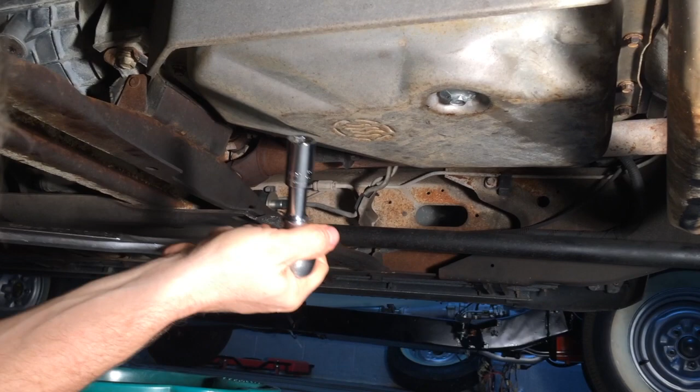Alright guys, like the title of this video indicated, we're going to be doing a partial rebuild on this 4L80E transmission attached to this diesel Suburban. Just going to start with draining the fluid out. Got a replacement pan bolt here. So let me get that going first and I'll explain a little bit more about what's going on.

Alright, so basically with those codes that this truck is getting, we're going to have to replace the valve body. And I normally would do this if I was going to rebuild the whole transmission. I did that several years ago on one of my other trucks, and I don't really want to get involved with that on this one. So I need just to get it back where I can get it running. And right now I can't get it running. It won't shift, going more than 35, 40 miles an hour because of this problem.

So what I'm going to do instead is I'm going to rebuild everything that I can get at from the bottom of the truck. Primarily to replace the valve body, but we'll also replace some of the springs and some of the other parts here. I'll take you through them one at a time as we go in here. So anyway, we're going to start with draining the pan contents, and then we're going to remove the pan. So I'm going to let this go for a while. We'll pause, we'll come back, we'll drop the pan, and then we'll keep going on from there.

All right, guys, have this finishing up draining. I'm going to go ahead and put the drain plug back in so that I can pull the pan. By the way, this was a 15 millimeter ACDelco replacement plug I had put on here a while back. You know, that original one from the factory with kind of like a Torx head never does last very long.

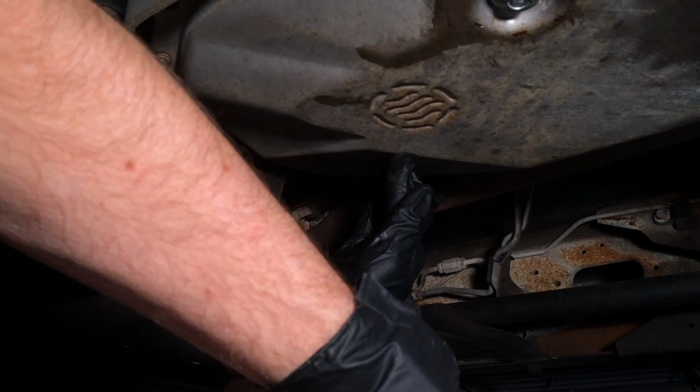So what I usually do is I get it out as far as I can to loosen it, and then I'll get under here and push this up, and then I'll just get in here with 2 fingers and unscrew it by hand. It's really the only way to get these ones in the back out. There's 17 of these bolts that you should have. And what I'm going to do now is finish this off. So I'm going to take these guys on the front out. I'm going to take this corner here off. And then I'm going to take the opposing corner over here off.

Okay, at this point we've got only 2 bolts holding it. I'm going to get all these bolts out of my way here. Set them aside.

And I've got this kind of leftover Thanksgiving pan from the wife here. I've kind of cannibalized. I've done this before in some other kinds of scenarios where I'm using transmission fluid drains. So I like to take something like that, sit it over the top here. You don't have a lot of room under here, but it's at least a little bit better on making the mess. Because what I'm going to do is I'm going to take the pan out of the way, and I'm going to use this to try and catch most of what's going to start dripping off here. Won't be able to get it all, but it'll make it a little bit easier.

All right, so now I'm going to push up again. I'm going to take the bolt I've got here in the lower left corner, left facing towards me, not from the perspective of the driver. And then I'm going to take the very last bolt up here off. All right, at this point, you've got no bolts holding it.

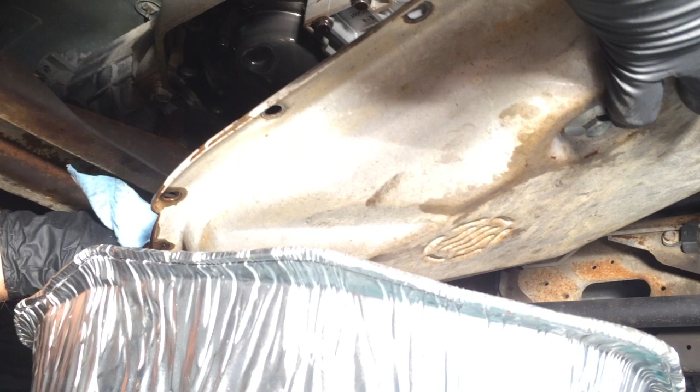Kind of lift it up now at this point. I'm going to try to get the pan to clear this rear cross member. And I don't know if you guys can see, but I'm just continuing to dump it in. Just a little bit more. And I'm going to lift it back up, and I'm going to take the pan and just kind of sit it over here to the side.

Because what I really want to do is I want to get this guy in position to catch the drips coming off the transmission itself. A few little drips down here.

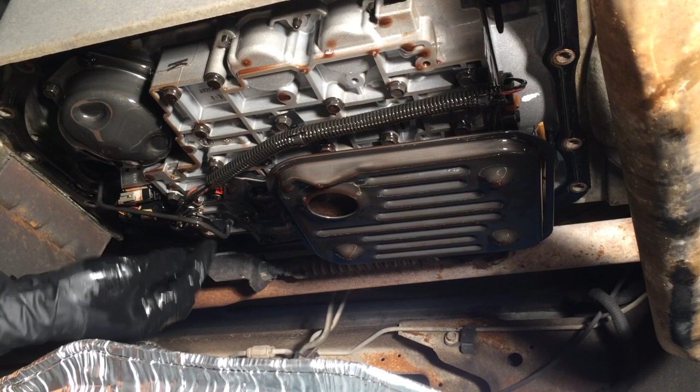All right, so basically we're at the disassembly phase now. What I'm going to do here is I'm going to let this guy drip for a while, and then we're going to come back in here and we're going to remove the filter, and we're going to remove the bolts that are holding these clips that are securing our wiring harness out of the way so that we can disconnect the wiring harness and set it aside. We're going to remove the clip that retains this oil feed pipe, and we're going to pull it out. And then we're going to start removing the bolts that hold the valve body into position, as well as the ones that hold the pressure switch over here.

First thing we're going to pull off is the pressure switch. So I'm going to pause the video here, let this drip for maybe, I don't know, maybe 10 or 15 minutes. We'll come back and we'll continue picking it up.

All right, we've let this guy drain, so let's go ahead and proceed with the disassembly. I'm going to take the filter off. Just going to wiggle it loose here from the bushing. And it's going to probably have some fluid in it that didn't drip out, so we're going to empty that out first.

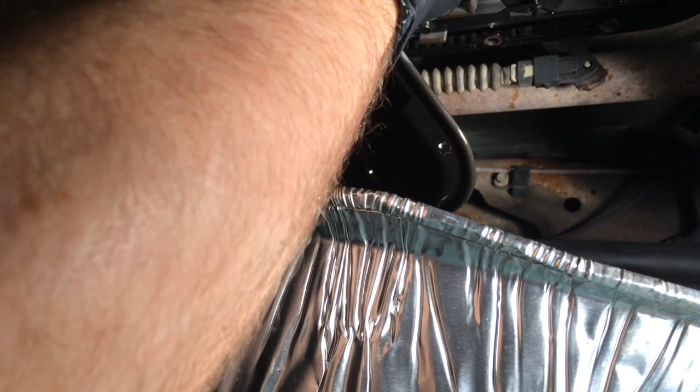And I don't know if you can see under here, I've got the drain pan I'm using to catch all this fluid sitting right in front of the oil pan itself from the transmission. What I'm going to do is I'm going to take parts like this after I shake a lot of this out, and I'm just going to set them over in the original transmission pan right over here, for example. Okay. And as I go, if I get little drips and stuff, I'm going to clean it up.

All right, so now we're going to start disassembling. So first, two bolts I'm going to take off in here. Clips that hold this harness on first.

Take these off, there's probably going to be some loss of fluid. I'm going to go ahead and put these in the pan as well. Over here. The clips themselves will stay on the harness, at least on the wire loom of the harness. Won't be able to catch it all. We'll catch enough of it. Okay, another one for the pan.

Okay, so the trick to getting this guy out back here, so you can see the first solenoid here, the A, is just one of these little ski clips. But this guy here, I couldn't see it until I got underneath, has 2. So you're going to undo both sides with the screwdriver. It's very similar to the guy up here.

Now this particular sensor here is just a single clip in the back, so we're just going to raise it up with the screwdriver. And then this guy's just going to pop right off, so it's just this little clip right here. And this guy is like the one on the front. It's both sides, and then it'll come off. All right, so we're going to sit this guy here. Now I don't want to get any dirt on this guy, so I got a little plastic bag, Ziploc bag, whatever. We're going to try to keep him in so that he does not hit the ground.

And then I want to get this pressure sensor plug off. In this case, it's got a couple of clips on either side that you squeeze. It comes off. Okay, so cannot get it off any further until I can get this crossover pipe off.

So what I'm going to do now is, so I've got my corner here, here, here, and here. I'm going to take these 2 out that are holding this shift gear position detent piece of metal lever. Loosened them already. This guy's under some tension, that's why you see him kind of flexing. And then we got the last one here. Again, I'm going to drop both of these into the pan. We'll clean all this stuff up later. Okay.

Now I loosened it. There's a bolt here holding a clip that retains this crossover pipe. So, and the pipe itself should just wiggle free like that. Put that in the pan. Okay, and then we're going to have to switch to an 8mm, I think. Let me see. Yeah, an 8mm, get this pressure switch off. Just going to loosen them for a second first.

A little bit of fluid's going to come out of here, no doubt. And some of these other ones that I was taking out off video, particularly these ones in the middle, when you take them off, there's going to be a lot of fluid that comes out. So just have whatever you're doing to catch all that in position. Since these are a different size bolt, I'm just going to put them in a little separate Ziploc bag I brought for myself.

I'm just going to take these guys off by hand as I go because I've already loosened them up with the electric ratchet. And hopefully that will give it time to drip out along the way. But we are nearly ready to drop the valve body. One other bolt here in the front that was obscured by that coil crossover pipe, this guy here, and then this guy here that we'll take out right after we finish this switch.

Go ahead and remove this last bolt holding on our pressure switch, and I'm going to remove our pressure switch while all this is dripping out here. Little bag here. All right, to get the pressure switch off, you just kind of give it a twist, and it'll let itself go. Okay, some of this runoff. Take this bag and put it in the drain pan as well.

And then we've got this bolt here. We will remove by hand. And this guy in the front. At this point, our valve body is only being held on by those 4 that we didn't fully remove. Okay, so again, I'm going to let it drip for a little bit just to reduce some of the mess, and as soon as it quits dripping, we will go ahead and pull the valve body. Let's come back in a minute.

So let's get this going here. So I'm going to push this catch pan and the little kind of oven pan I was using to catch things. I'm going to slide a new one into position, mostly because I just want to get more room to work here so I can drop the valve body. I've taken the cables, as you can see, and I've taken that bag and I've just rubber banded it aside so that I can make sure that none of this gets into the dirt or anything.

I'm just going to kind of pull it out of the way for a minute, because one of the things I did notice that we left up here was the actual pan gasket. It's kind of stuck up here. Yours might not have done this. They usually stick to the pan. I didn't even notice this until the last break there. So these gaskets are reusable, so as long as we don't damage it, we can keep it. Okay, get this guy out of here. Set him over on the pan where he should have been all along.

I'm going to take our wiring harness, kind of tuck it up under here, stick it up out of the way, keep it in the bag so it doesn't touch anything, get any dirt on it. Don't want to get any dirt at all on this. Okay, so very similar to the pan now. This guy's just held in by the screws that are here. I'm going to go ahead and take this guy out, so that'll leave just one in the back. And I'm going to go ahead and take the opposing corner off over here.

Now, the one difficult part of this whole thing, doing it upside down like this, because normally you'd have this transmission out and on a stand flipped over, is there are some little check balls that are going to be on this valve body on the other side. And probably when we drop it down, they're going to go everywhere. There should be 8 of them, although there's a couple of variants of this that might have 9. But just telling you right now, when you drop this, be watchful for that.

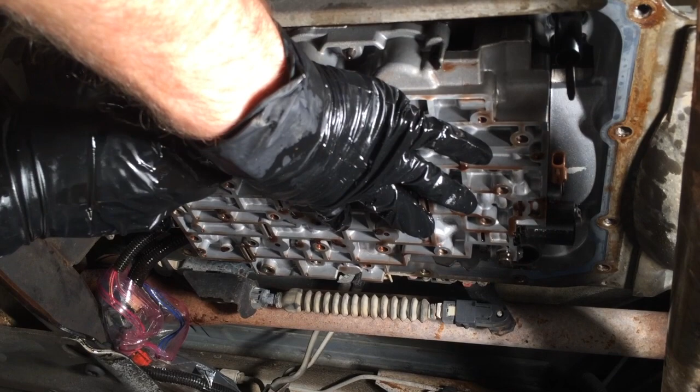So I'm going to do some last bit of positioning here. The plan is just to kind of drop this thing right into this pan I got below me. I got everything disconnected now. All right. I'm going to take this screw off. And then it's only held by this guy up here now. And I'm just going to let this guy fall down. Now there's also a spring-loaded guy that's going to come out with it. Let's get it into position here and I'll show you.

This guy here. So be watchful for him falling off as well, being upside down. We're going to replace all this anyway. Okay, so looks like I'll pull this out where you can see it. You can see those little balls I was talking about. Looks like they all kind of stayed on the gasket, which is a good thing. I'm just going to clean up some of this spillover.

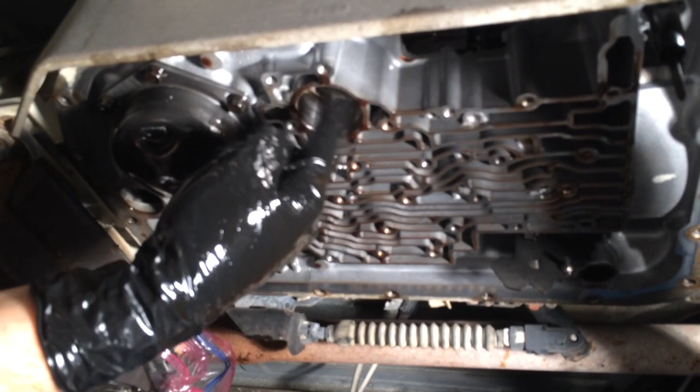At this point, we're almost done with what I had planned to do here. The only other thing I'm going to do is I'm going to remove this reverse servo cover here. I'm going to change out the spring while I'm in here. I'll replace this guy, and I think that's about it. I'm going to put some new check balls on it. I have an ACDelco rebuilt valve body. I'll show you all these part numbers in a minute.

I'm just taking a look here. You know, things don't look too bad. I think probably that valve body and some sticking solenoids were causing those codes, like that P1870, for example. All right, so let me pause the video so I can pull this stuff out from underneath the truck, show you what it looks like, and also show you some of the new parts.

So I've just gotten out from under the truck. I've pulled this pan out. This is exactly what you saw me drop down. And so here we have our complete valve body assembly and throttle valve assembly, and then we have the gasket sitting on top of it here, and then these are those check balls I was talking about. So there are 8 of them, and we got lucky. They're all exactly where they should be. 1, 2, 3, 4, 5, 6, 7, 8.

And then here's the first to second servo piston that normally sits right here, and that guy came out of his passage as well. So let me show you some of what we're going to be doing to rebuild this. So I've got a new pressure switch here, GM part number 242-22077. So since we got all this taken apart, we're going to go ahead and put a new pressure switch on.

I've got a part 242-23081, and this is a rebuild kit. This is basically going to replace our first to second servo here. So we're going to have to assemble this. There's a clip in here, the piston and the shaft, and this clip holds it down, and there's a seal that goes around the outer edge. Kind of see the old seal here. So I'm going to toss this and completely rebuild this. This is a revised design, so we're picking up the latest design here for the 4L80E.

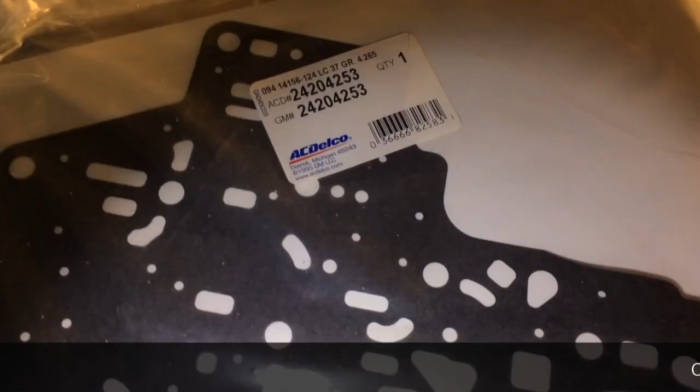I've got a new gasket. So this is this black gasket you see on top of the valve body, and this is a 242-04253. Right, so this is a whole new gasket that sits on top here. Now, I was going to try and reuse it, but I noticed that it had a chip out of it, so I'm going to go ahead and replace the pan gasket. So this is an 867-7743. It's a new pan gasket.

Here's our filter. We're going to replace the filter. It's a 242-10956 GM. And this guy's out of the way here. Also got a new gasket for the reverse band servo that I haven't removed yet, but I'll show you. I'll take that off before we stop filming. 867-5728, just a new gasket for that guy because we're going to change out the spring that's in there.

And here's a part number for that spring. 865-5843. We're going to change that out too. I haven't shown that yet. We'll do that in just a minute. And then I've got this big box, part number 192-07801, and what this is is a rebuilt valve body. Let's get this guy out of here.

So what you end up with here is, basically set these guys side by side for a minute. This is this entire assembly here, plus that gasket I showed you, and plus those check balls. Let me show you those guys. So those check balls are part number 104918. This particular package has 5. I've got 2 packages, so that I'll have enough to replace all 8.

And yes, you should replace these balls. They wear over time, and the orifice in the steel plate, I don't know if you guys can see because the truck's pretty big, blocking things, but the plate can get worn as well. I'll take all this out of the plastic and we'll look at it again as well.

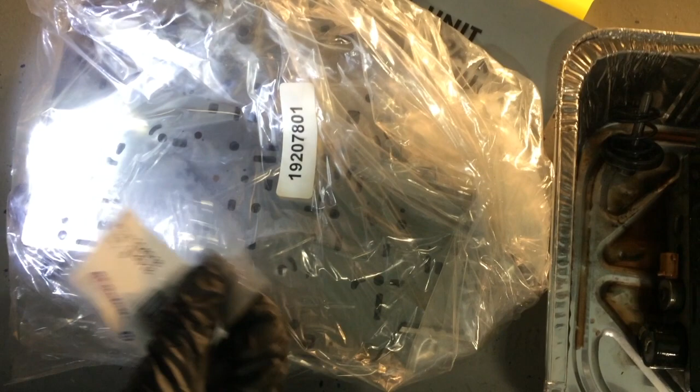And that's what we're going to do. So this is like a partial rebuild. I've got some other parts here; after I get underneath, I'll see if I can get access to them from below the vehicle with the transmission on the vehicle. And if I can, I'll show you how to replace those. But this is the main thing, and replacing this guy is what's going to get rid of those codes.

What happens is these solenoids here, typically for that P1870 code, either get debris in them and start binding, or they wear and don't do their job as efficiently, and that's one thing that can lead to the kind of codes that we're seeing. So just changing the valve body out—I know a couple of times I might have misspoken and said throttle body. This is a valve body for the transmission. That usually will be enough to cure the codes that we're seeing here.

But we'll try to see whatever we can get, because it's going to be a while before I rebuild this whole transmission. All right, so I'm going to put this stuff aside. And by the way, you usually get a core credit on something like this. You can ship the old one back.

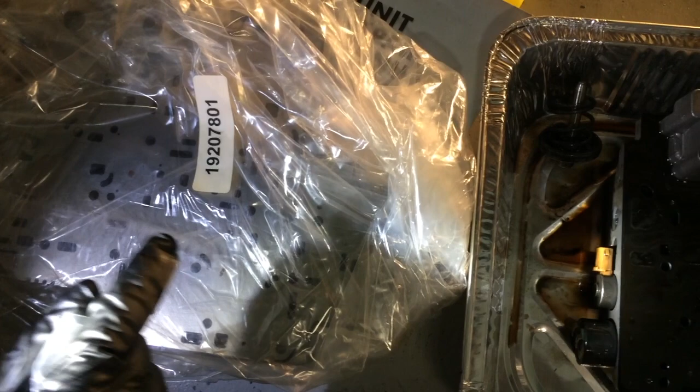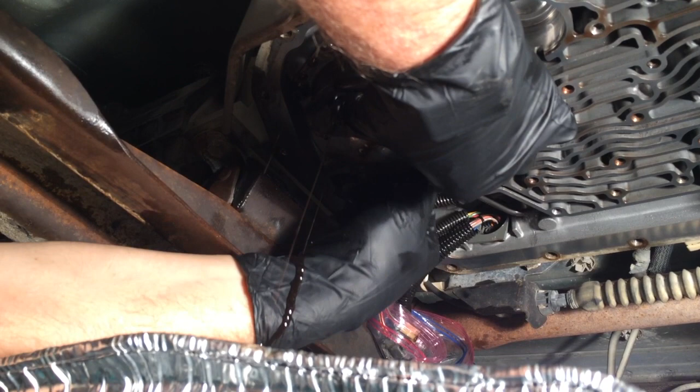Just not to drop them into the oil pan here and have to fish them out. That guy I'm going to leave partway on because he's going to be my emergency one in case I drop him. Here. There he goes. All right, I'll finish this off by hand. Got this bolt on this side. This one that I left partway on. Collecting a handful of dripping old fluid right now. Okay, got all the bolts off.

Now we're going to drop this guy down. I'm just going to dump the fluid that's in here. That was a gasket that you heard fall out there. Just going to reach over and put this guy in the pan. Everything else. Okay, and then this piece comes out. Same thing, it's going to be full of fluid. Going to hold on to this spring while I pour that out. Okay. All right, and we're going to put this guy in the pan.

These are things that we're going to either clean up or replace parts. Like that spring I showed you earlier is definitely a piece that we're going to replace. I'm going to see what other parts I have that I can use to replace or rebuild that item. Now there's probably one other thing here. Just taking a look here real quick. I'm going to get a clean paper towel and dab up some of this fluid that's sitting here so I can get underneath and take a look. So I'm going to pause for a second, clean that up, and we'll come back.

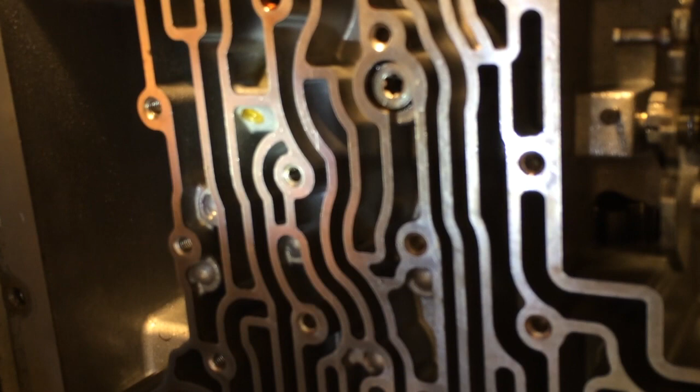All right, now that we got this reverse unit out, we're going to get a couple other things out, and then we'll be ready to start reassembly. I'm going to get a little Ziploc bag here. What I'm after is this torque converter clutch solenoid filter that's here. And we're just going to pop this guy out and catch him in the bag. I'm just going to use a little tool here.

It's actually a tool that's used to remove a chip from a DIP socket, but I think it'll work good for this too. Just want something that you can get on the back of this guy and push him down. Oh, there he goes. And of course he missed the bag. Clean him up extra good this time. All right, got that guy out. The next guy we're after is this pressure valve. This is the last thing we're going to try and remove.

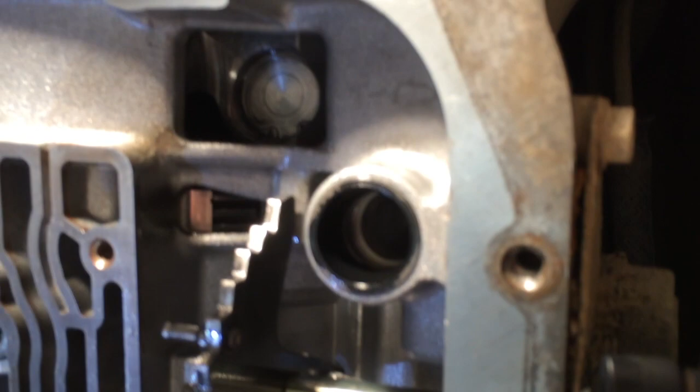To get this guy out, I'm going to use a screwdriver to push up against it. Get some light in here, and get me some light too. Basically, I have this guy push up against it while I try to take the snap ring out. It's under some pressure, not a lot of pressure, but it's enough that we want to try and hold it back a little bit when we do this. All right, so let me first see if I can get in here and grab this snap ring.

There's the first guy, there's the second guy. Oops, almost had him. Okay, first pin. Second pin. Keeps slipping out on me. I have to change my pin sizes here. Let me try this again. Give myself a little bit more light.

Just not cooperating. Trying to get this snap ring moved over a little bit. Might make it a little easier for me. Obviously I cannot see all the shadows. What's going on? Moved it a little bit. This turned out to be probably the hardest thing that's happened so far in this little job. At least now I can see it.

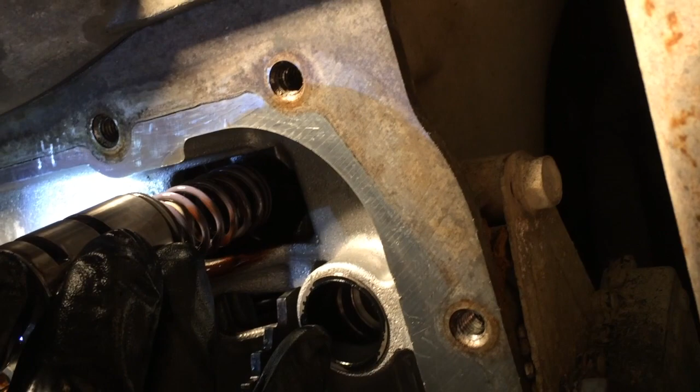There we go. Alright. Sorry about that. Alright, so now I'm going to get this guy to come out here. Alright, it's loose. Alright, so get my little bag. Snap ring in it. And this guy's going to drip a little bit, so make sure you have some rags ready. Actually going to drip a lot. Alright, we got the spring.

Valve. There's still one shaft piece that we're missing that we need to get out. So let's drip for just a little bit. Let's see if I can go get the last piece of it with my finger. I'm feeling in there. Not wanting to come loose.

Alright, I'll show you guys what's going on. Right, there's a shaft piece right up in that barrel there. It's the last thing we need to get off, and then we are done with this half rebuild disassembly. It's this piece that goes up into the pump, the front fluid pump. I can feel him trying to come down. He's catching on something.

If I can't get him out, I might just leave him up there because the main thing we wanted to replace is the spring. Just wanted to kind of get him out and inspect him, see if he was okay. Something here. My screwdriver. Nope, it's just not letting go. Just was about to call it, and I felt him loosen up and fall out. All right, there he is. There's our valve itself.

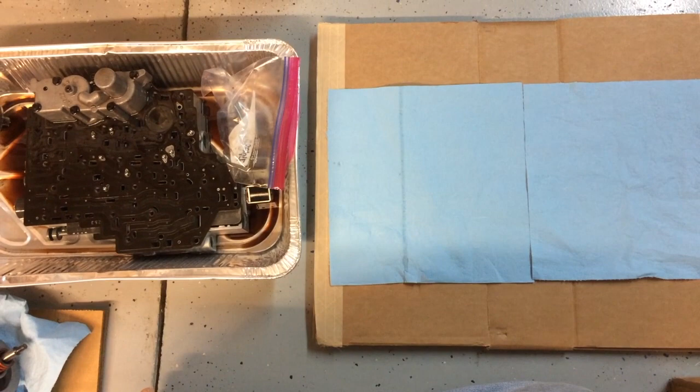All right, let's start getting this stuff ready to put back together. So I'm going to open up our rebuilt valve body, ACDelco. Lay him out here next to the old one. I can already see something I don't like. I'll show you guys in just a minute.

What I see has happened is there's a couple of spots of corrosion. I don't know how long this guy was sitting, but that is the first thing we're going to have to take care of. I kind of saw that through the bag, but I wasn't sure until I got it out. So it's probably okay, but it bothers me enough that I am going to try just to touch up 1, 2, 3, 4, 5 spots.

Just going to take some kind of painter's tape. Won't stick a lot. And I'm going to block off the passages that are adjacent to what I'm going to be working on with this. I'm just going to take some emery cloth and kind of file that down. Looks like I'm going to have to ditch the glove to get the tape off. There we go. Alright, so just going to tape this guy off like that. Tape him off like that.

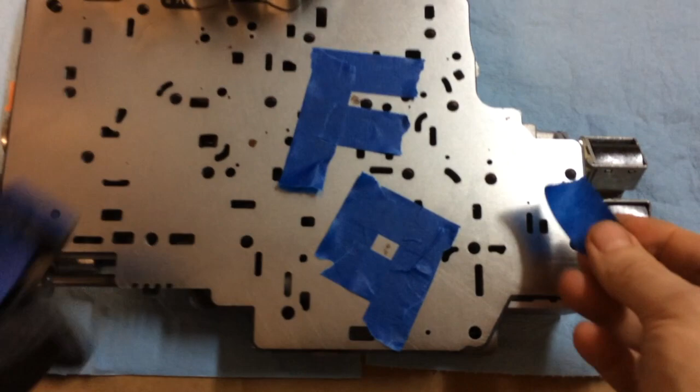Tape him off like that. All I'm doing this for is, since I'm going to be abrading this, I do not want to have anything get into one of these orifices. That would be disastrous, probably more so than just leaving this. I don't know. We'll go this route because I really don't think there should be any corrosion on something like this, and this probably was just sitting in the warehouse for a while and got like this. So unfortunately we have a little bit of extra prep to do that we shouldn't have to do, paying for a brand new component.

Alright, so particularly after this little hole here. Alright, so that one's ready to do. This guy is next. A little bit over here. Make sure this is all down nice and tight. Go ahead and get this middle one here. You see there's actually some type of anti-corrosion coating on this steel.

Just a shitty job, Delco. Shitty job. You open the American plant and close the Mexican one, you'll be better off.

Alright. Got the one up here that I want to knock out as well. The only reason I'm doing this, I'm just worried that this kind of stuff could start bubbling up if you leave it go and don't try to do anything to treat it. And then at the end of the day, what you'll have is cross-passage leaks anyway as the corrosion lifts up and breaks the gasket seal. So, trying to avoid that, get the full life out of this repair that I'm hoping for.

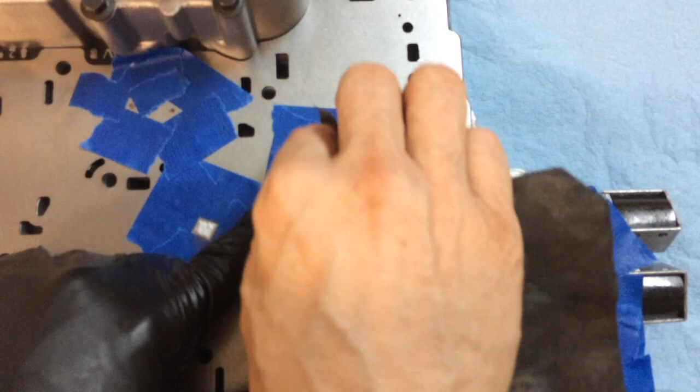Before I bought this part, when I was looking for the best price on a genuine GM rebuilt, I did see a couple of surplus of these that were from the U.S. military that were held off for Humvees, which would have these 4L80Es too. And I can only imagine the degree of corrosion that they probably had if something like this from Rock Auto was like this. Alright, just about done here. So I'm going to pause this, finish getting this surface corrosion emeried down, and then we'll pick it up.

Got this done. I'm just using another piece of tape to pick up any little small fragments that might have escaped our little restoration project here. Pull this guy off. Next thing I'm going to do here is get ready to put the gasket in place. Good measure, I'm going to take another round of tape here. Just make sure anywhere that we go near an orifice, we make doubly sure that we're okay.

Alright. Now I'm going to take a clean paper towel, shop towel. And all I'm doing here is what should have happened when this was rebuilt, is taking this anti-corrosion compound that is already on this steel plate and making sure that it gets spread around to these areas that obviously did not get treated properly. And that should help with this problem going forward. Okay, and then just to make sure we don't have any fibers. Now we're ready to get going.

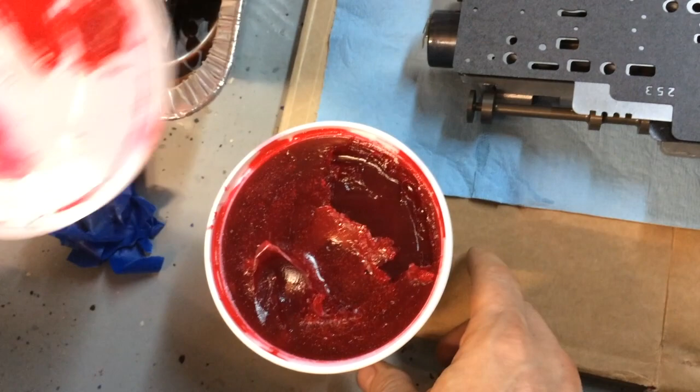I'm going to be using some Transgel Red. This is actually what the factory assembly manual and the factory repair manual, service manual, whatever you want to refer to it as, would have called for. It's a good kind of adhesive as well as a lubricant. I'm going to take a little bit of this and pick a couple of places here to put just a thin amount of this. I'm just going to use this to tack this gasket in place. That's the only reason I'm doing this.

Might even just spread some of this on some of our corrosion areas. How about that? Two birds with one stone. Okay. Take this guy and get him into position. See if we can get him to stay where we need him to be. I need to put a little bit more on there. He still wants to move.

Line these guys up by eye. And then what I'll do is I'll put some bolts in here to hold it in position until we get ready to assemble it. Alright, that is probably as close as I'm going to get this. Run the actual bolts through. Okay.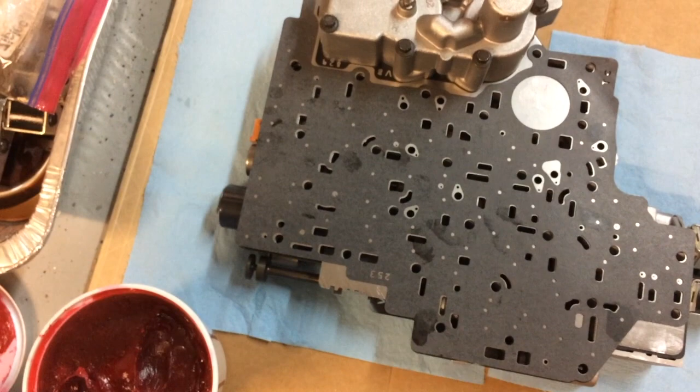All right, next thing we're going to do is we're going to put these new check balls in. So just open a package up with these balls, dump them into the trans gel here, the first 5, and I'm just going to match up the position we see on the old one. All right, so we got a guy back here. Don't want to get too much of this stuff on here. Guy right here.

Back. Guy on the far side over here. Just don't want these guys to move or walk around. The idea is that this type of assembly lubricant will break down in the transmission fluid anyway. All right, now we got to open another package of the balls. There's 5 in a pack. We're going to need 1, 2, 3, 4, 5, 6, 7.

1, 2, 3, 4, 5, 6, 7. Sorry, 8. Just happened to catch myself there and notice that. All right, so 1, 2, 3. 2 extras. And then after this, we're going to start moving on to the second to first servo. All right. That should keep these guys all where we want them.

Okay, so next guy would be this one, right? So this is the guy that normally sits right here, and there's a spring and an assembly. It consists of a shaft, a retaining pin, a piston, and a piston seal. And I showed you guys earlier on. Find where I did with it. There it is. There's a rebuild kit for this, and it's a GM 24230818. So that's the next guy we're going to put together.

Okay, so we've got a spring, we've got a seal. This looks like some type of little anti-corrosion thing that we've got in there. We've got a piston, we've got a shaft, and we've got retaining clip. Right, so I'm just going to take a look and see. Yep, this is the outside. I'm going to take the shaft, would go like this, and then the retaining pin would go here. I'm going to take some of our trans gel lube, put it on here.

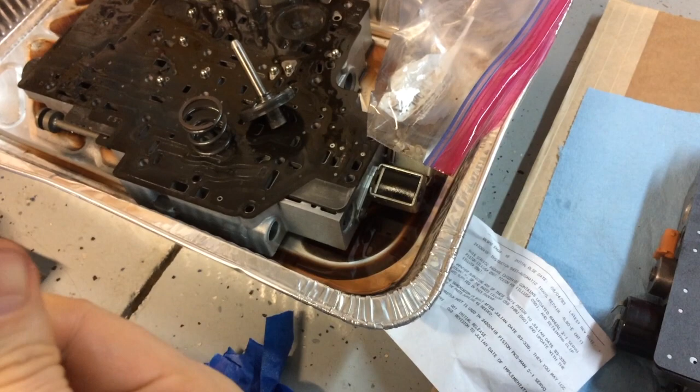I'm going to take this pin, get him into position, and I'm going to get a pair of pliers. Hopefully these guys will be big enough. Might not be, might have to get something else. Larger pair of pliers to get this on. Let me see if I got some laying by next to me here I can use. Might not. Alright, I'm going to have to get a different pair of pliers to squeeze that on. I'll do that in a minute.

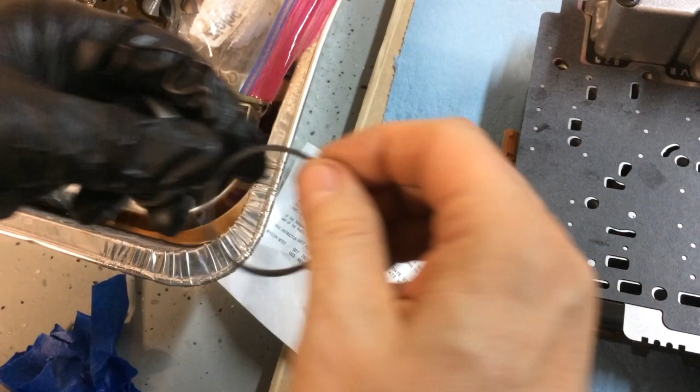I'll take the trans gel here. I'm just going to lubricate this seal. It goes around this piston. This guy into position first.

Alright guys, sorry about that. The phone ran out of space, so I had to copy the videos I had, and we're going to pick this back up.

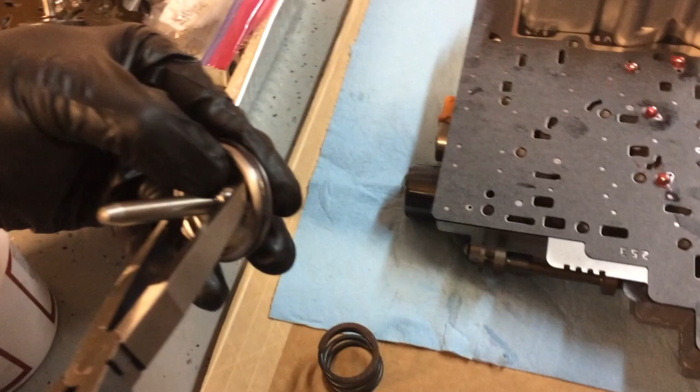Alright, so we had just finished up getting this servo piston seal on, and we just need to finish this assembly with getting this little C-clip retainer into position. Hopefully one of these other larger pliers I brought over here will do the job. Push this guy in. Not sure why it's under so much pressure. Almost, maybe. Let's see what our old one looks like. So it sits, yeah, I guess that's it. It's in position.

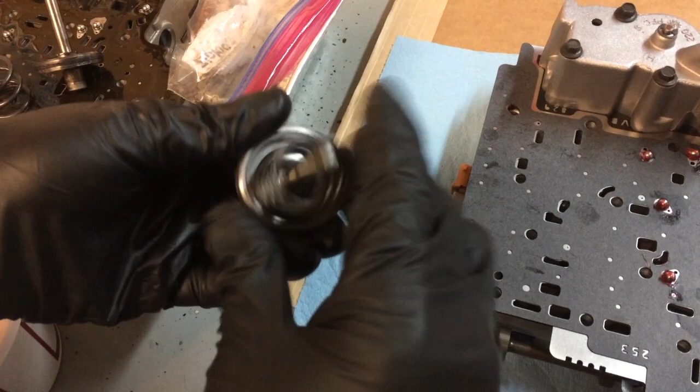See if it goes down anymore, because it just doesn't look like it's exactly there. Alright, so now we got this in place. We got a spring, and we got this guy. I'm going to put him in a Ziploc bag, all ready to install. And the other things I had worked on off camera previously, I had taken all of our mounting bolts, cleaned them off, and got them ready to use.

I had taken the pawl that sits over and holds the gear position. I got that cleaned off and ready to use. I had taken and cleaned off our oil feed pipe bracket and mounting bolt, and I had taken some compressed air and blew through here, so I got that guy all ready to reinstall. I've got our bolts, the 8mm bolts that hold the pressure switch, all cleaned up and ready to install. And then these would be the short stubby 10mm bolts that would hold the reverse servo.

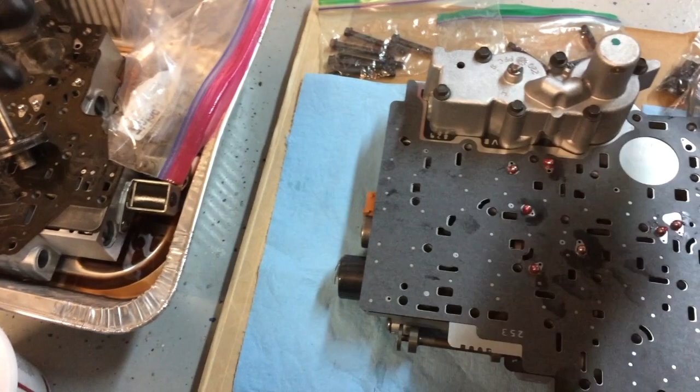So let's start working on that guy next. So I cleaned him up, as you can see, and we're going to redo some parts on this guy as well. So we're going to discard the old spring, and we're going to go with a new spring. Again, part number wise, this is 8655843.

Now I'm going to change out some other parts on this as well. So keep my new spring aside here for a moment. So what I really want to do is I want to get this spring out of here as well, and I'm going to replace that with an 862-3666 replacement spring for this guy.

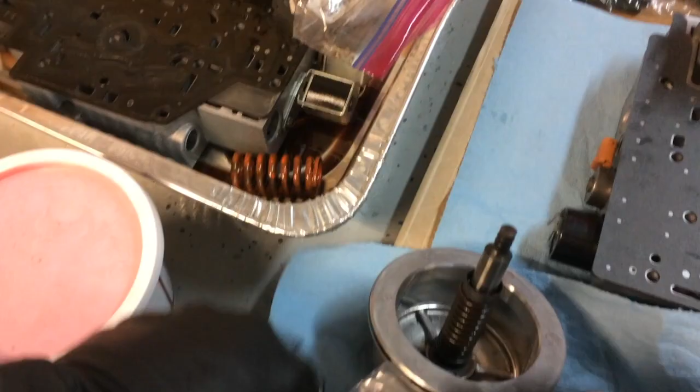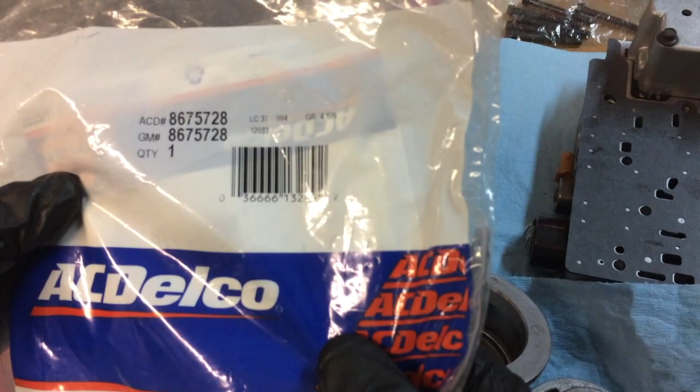So I'm going to go ahead and set the gasket right over here. And I think that is the extent of the pieces for this. So let's go ahead and go in on that. So I'm going to open up this guy. This is going to be a replacement for this. Assembly goes in position here.

And I'm going to start with, I'm going to put some trans gel on this outer seal just to make it easier to get in position. This guy's going to go right around the outside of this. Make sure it doesn't get kinked. It's kind of like a sideways slit for this stuff. There he goes. Alright, he's in position the way he's supposed to be.

Do the same thing on this smaller seal. Position him up at the top. I'm reasonably sure there's probably some kind of special tool that the dealer uses for this stuff, but I don't feel you need any of that kind of money wasted on tools you only use one time. Alright, so at this point this assembly is done, and we'll put our old one in the discard pan.

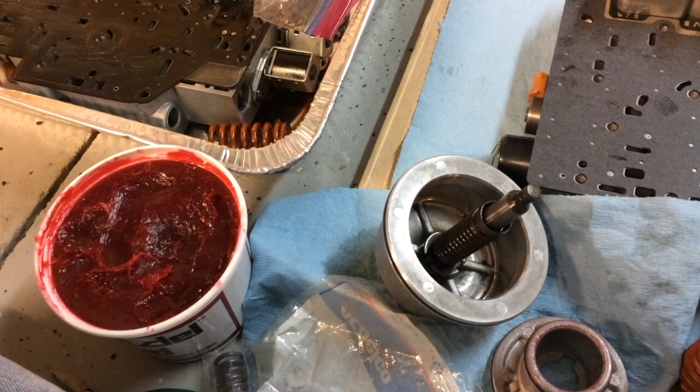The next thing we're going to need to do in order to change this spring out is we're going to have to take this retaining clip out. But before I do that, I think I'm going to try and pull this seal and change him. So let me do that. Or let me not, because I do not see my flathead screwdriver to get that out. So I'm going to have to pause for a second. Forgot one of my tools.

All set. I'm going to use this small flathead screwdriver to get this old seal out. At least that's what I'm hoping to do. There we go. It's been in there for 20 years, so he's just not wanting to come out. I have to get a different tool for that.

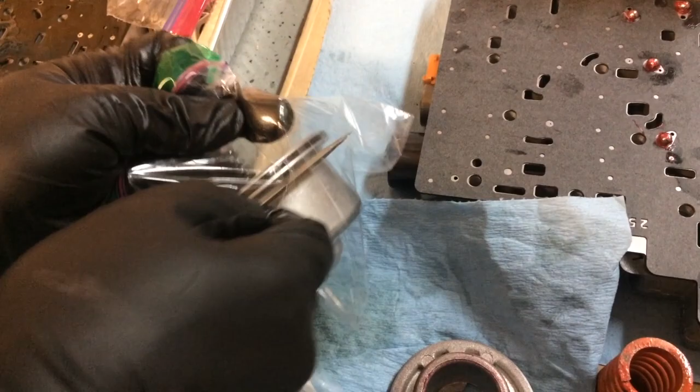Let me go ahead and get this C-clip off. Now, this guy's under a lot of spring tension, and my luck, the little guy will shoot off somewhere, so I'll kind of do something like this, where I put this bag over it. And just punch a hole in the bag, and get the clip off that way. And I can control the spring tension on the other side just by having it against the floor. Almost. Alright, there we go.

So, take this whole thing off as a unit. Our little C-clip in there. Alright, so we got a spring and retainer, and then we got a shaft and a retainer, and then we got this spring. This is what I wanted to replace. Set the old one aside. Got the new one. I don't know if I showed the part number or not, but that's 8623666. This bag opened. This guy on here. This guy on here.

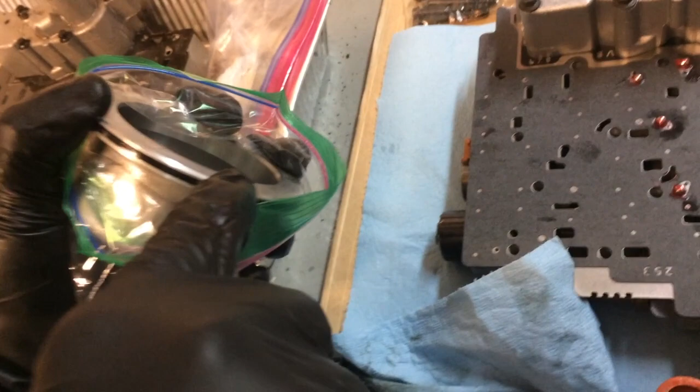Now we need to get that seal off. Try one more time with the screwdriver, but I probably need to use a special kind of picking tool because I don't want to damage the aluminum housing while doing this. Yeah, no, I'm going to go get a pick type tool. Alright, let's try this again. Hopefully this kind of pick tool will tear this seal off, and we'll just peel it off. There we go.

I like to use something like this to just kind of dig into the rubber of the seal without touching the aluminum until I can get it. Well, I had it. Would have been all done if I hadn't slipped with that just then. Alright, let's try not to slip with it this time. There we go. Got this seal off.

I'm going to open up this new bag of seals. I think I showed the number before, 8623430. One of these out. And we'll put some trans gel on this. Lubricate it up. Then we will reinstall it. Just make sure you use your thumb to kind of keep it from working its way out on the other side.

Reassemble this unit with our new spring. Put our C-clip back on. Now the new spring is obviously going to be under even more tension than the old spring, so just be cognizant of that.

Here. And naturally I didn't have the pliers ready. Reach over here with my left hand. This guy going again, I'm going to line him up. And by the way, I didn't point it out maybe, but I'm pushing against cardboard down here. You definitely don't want to push against concrete or anything that might damage the shaft. You know, no nicks or bends or anything like that.

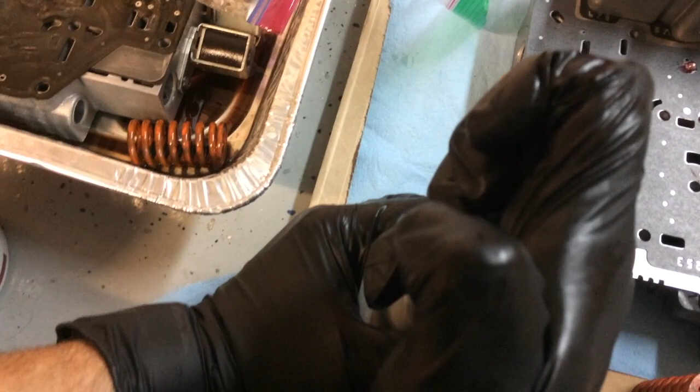Alright, let's try this again. C-clip into position. Alright, well, that looks like we might need a new C-clip. Let me pause and see what happened to that. I guess it was kind of good that that clip popped off, because it caused me to remember that I accidentally flipped something here wrong. This should have been like this. And it also caused me to remember we didn't change that accumulator spring. That was the one part I had left over here.

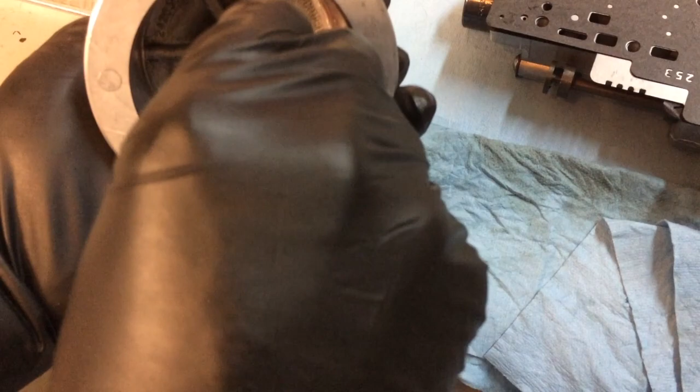So that's 24202987, and we'll put a new one of these in here. At this point, the only thing I regret is not having a new clip. So, take this guy, throw him over there. Now, this is all new. And now we'll put that clip back on. Hopefully that'll be the end of this particular piece, and we can start reassembling everything. It is okay. It's got to get lined up, and then you can push it through.

Okay. I don't like how that clip just kind of slid right in there, but it looks okay. All right. And this sub-assembly is ready to put back in for this accumulator piece. So I put the housing that I cleaned up in there. I'll just reuse this bag. Catch this in the disassembly. All right, so we have only one more piece to get ready, and then we can go back under the truck and start putting this stuff all back together.

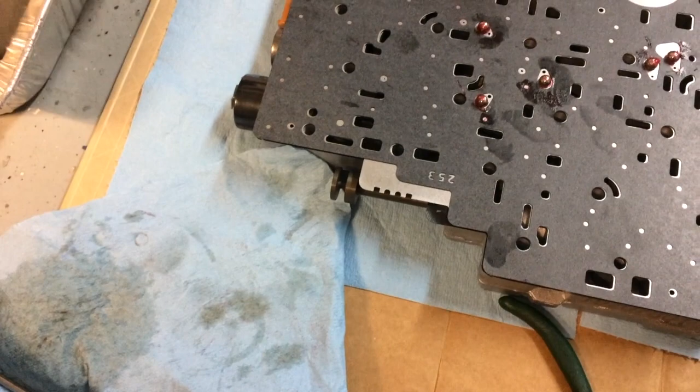And that piece would be the pressure valve assembly that we took off at the end there, as well as the little spring. It's going to be the little thimble screen filter. So we'll lay these parts out next. Infamous snap ring, and then we have our little filter. So we're going to replace several of these parts inside of here. This guy should come off, I believe. Yes, he should. There's a piece stuck in here. Let's figure out how to get that off. Alright, let me go over some of these other parts.

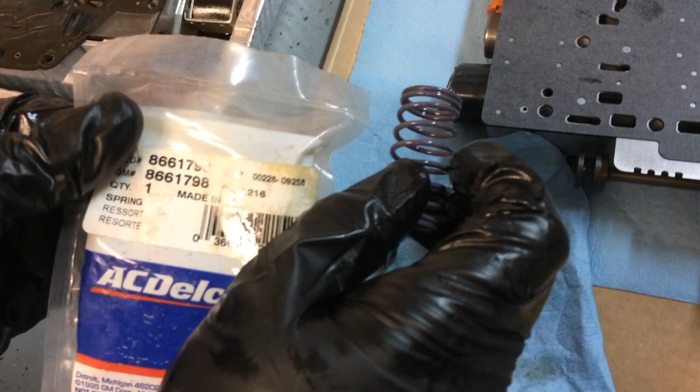So we're going to replace this purple spring with another purple spring. Depending on the year of your vehicle, there are different part numbers here, but for this 99 4L80E version, 8661798 would be the purple spring. So I'll put the old spring in there. I'm going to take my new spring. We're going to be reassembling here. So there's my new spring.

The next part is going to be a new valve shaft itself, which is this piece here. And that's going to be part number 8680547. One thing I like to do is make sure that it looks just like my old one, because there have been several different designs. You know, sometimes you order the wrong part number. This looks correct, so this guy goes in here. That guy's my new one.

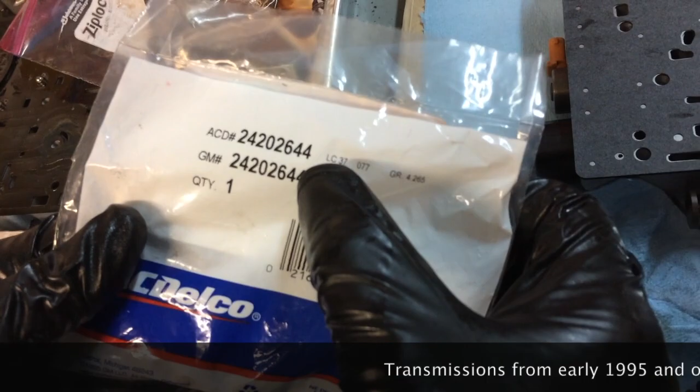The next part I've got here, if I can find it, okay, the next part is this piece that sits inside here that's currently stuck right now. This is a 242-02644. As soon as we can get the old one out of here, we'll be able to put the new one in. And I also have a new one of these guys here. Yeah, here it is. This would be part number 242-02645. So I might just toss the whole bunch here, because all we're really going to have is this guy. We're going to have this guy.

Like that. I'm not sure why the old one is stuck. It should be free to move like this, but it's not. So I don't want to spend a whole lot of time trying to figure out why. Now I did have, I cannot find it right now, there it is. Okay, a replacement of this spring, and that would be 8680551. So I'll take this old one, it's got white paint on it. There's the white paint. Sometimes you just want to make sure these things look relatively the same before you change them out.

Alright, so we've got all these pieces now to reassemble everything. I'm going to get another Ziploc bag to put these pieces in. I'm going to clean this filter. Normally I would replace this, but I quite frankly forgot to buy one. So I'm going to just have to make sure that this guy is nice and clean, and we'll put him in. A little dab of trans gel will hold him in place, and then we'll start reassembling everything. Alright guys, come back when we're ready to do that.

Guys, let's start putting this back together. I've got my little filter that we've cleaned. There was actually a little shard of aluminum in there, so it did its job. What I'm going to do is put a little bit of trans gel on it to hold it into position here. So that guy's done. Next thing we're going to do is put our pressure valve piece back together again, and we'll go fight with that C-clip.

So we've got our assembly here ready to go. Get my pieces out. Just give me a second. Alright, I've put some trans gel on these parts to hold them in place a little bit. Alright, so here's our first guy. We're going to put our valve piece in here. This is the guy that didn't want to come out last time. We'll see if he wants to go back in. Just got to go a certain way to get it to fit in the little top piece.

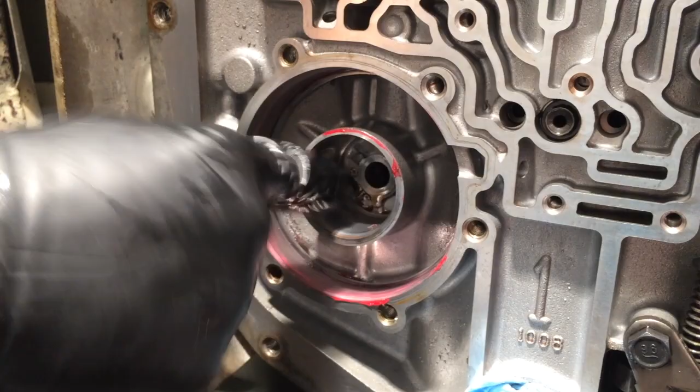Right, the next guy we're going to do is this reverse servo area. Let me move a little bit out of the way. We're going to do some trans gel along the inside here of the bore. Okay, and then we've got our whole assembly for this. And we got to get a new gasket and our bolts, so just give me a sec. Gasket. Our bolts. Okay. It's always hard to get these bags open again when you got trans gel all over your gloves.

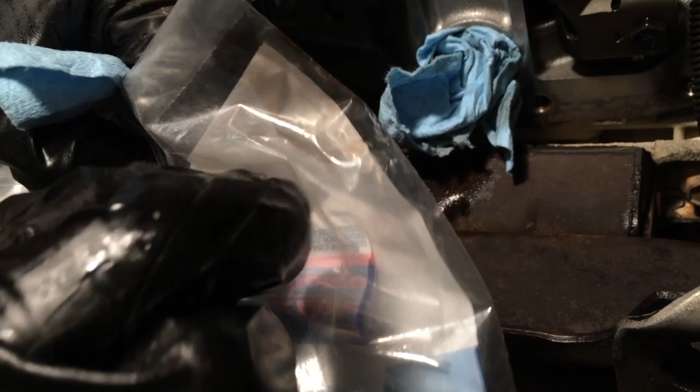Okay. This guy off one last time, and then I'm going to trans gel along the seal all the way around. And even though I know I probably did it before, trans gel along the inner seal. Okay, got him in position. Now we're going to take our new gasket. We're going to use our screwdriver to help tear this bag so that we don't do a lot of force on it. This is a very thin gasket. It's made of metal. You can't reuse it. I want to make sure we don't bend it. Okay.

Naturally, it's a double bag, right? That's real helpful, Delco. Thanks a lot. Okay, so again, that was an 867-5728. Looks like they're double bagged now. Oh, maybe not so bad. Looks like maybe it's open on this side. Okay, somebody was thinking. Okay, so we're going to get this guy in position.

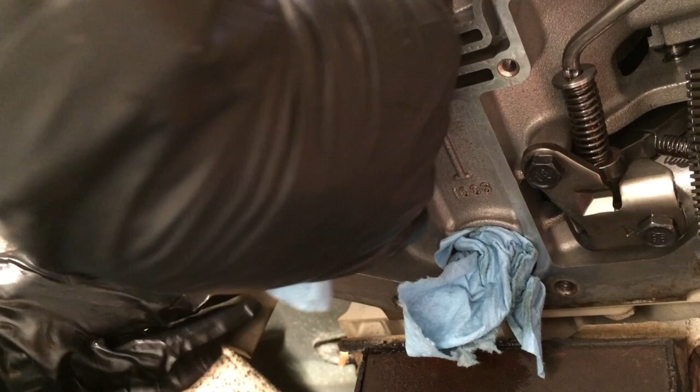This guy only goes one way, so when we get him where he's supposed to be, he will line up properly. I have to give this guy a little push in here to compress that new spring, because you're trying to get it flush enough to get this in position. And then the gasket goes with this square piece where the fluid goes along the back side of this, where it's slightly recessed. It goes like that.

And then we're going to take our cover, which has a corresponding shape like this, and we're going to get just a couple of these bolts started by hand. All right, and then one more on the other side here. Okay, at this point we're ready to torque this guy down. I'm going to go ahead and put the other bolts in, and then we'll come back.

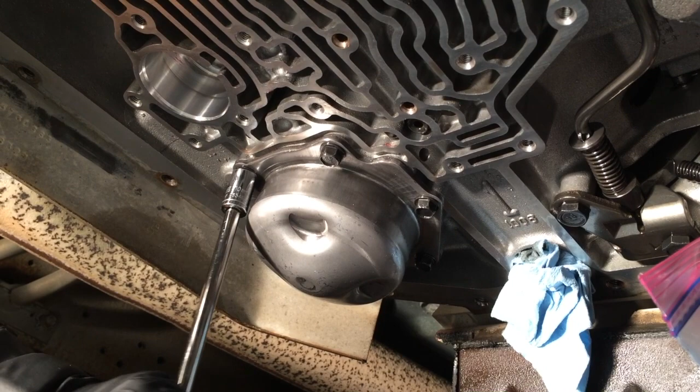So let's just get this guy torqued up. There's really not any specific pattern called out in the service manual. I just like to do an alternating when you're doing these kind of things. All right, I think we're done here. Check them all because I don't want to open this thing up again.

Now it's very important that you do this first, because if you don't, you won't be able to torque everything down. If you put the valve body on, it'll obscure your access, I believe, to this one. One of these two, I forget. But anyway, let's just keep going. All right, the next thing is our

2-1 servo. I'm just going to put some trans gel up in here to make it easier. Also, it'll help hold it. It should be pretty stiff with that new seal. I don't want it falling out on me, though. Okay. Take it out of our little baggie. And we'll put some trans gel around the outside here as well. Okay. Position him up inside here.

I guess this new seal, just going to have to get it to go into the bore here. There it goes. All right. Just making sure he's not binding or anything. Okay, he's working good, and I feel reasonably comfortable that he's going to stay up there and not fall out. Okay. All right. Now it's time to put the valve body on.

And we're going to bring our valve body into position, and tilt it over here to the camera. You can see we've got our ball still held in with the trans gel. What I'm going to do is grab a couple of the 10mm valve body mounting bolts, and I'm just going to come underneath here because I'm going to be looking to get the manual valve lined up with the shift lever pin.

And then I'm going to push this guy up, and I'm just going to manually start putting in the bolts. So I'm going to get that lined up first. And I'm just going to push him into position. Take this guy in the front here, and I'll get him started first.

And then I'm just going to go on the opposite corner, all the way over here, and get this guy started. Okay, at that point, it'll stay up here on its own. Sorry about that, bumped the camera.

All right, so now I'm just going to come down here and start grabbing some more of these bolts. We're going to skip these two positions because those are the bolts that are going to hold the pawl for the shift detent there. And I'm just going to start feeding these guys in. We're going to skip this position too, because that's the bracket that holds our crossover pipe.

We're going to skip this position because that's going to be one of the brackets that holds the wiring harness. And we're going to skip this position because that's the other bracket for the wiring harness. So let me go ahead and feed all these in, and we'll come back. Right, we got most of these in. Still looking to dab up things that are leaking.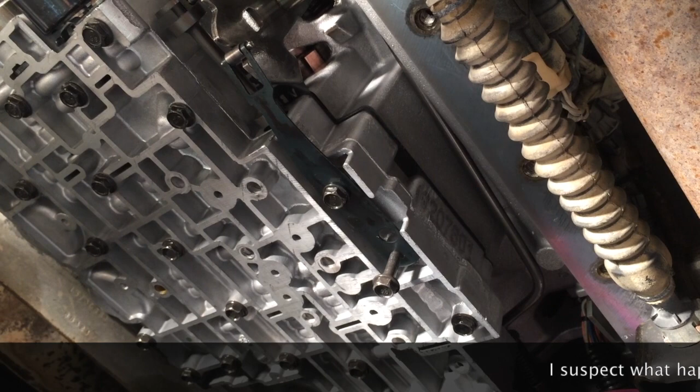That one's kind of tight for some reason. Let's see what's going on with that. Whoops, it's real slippery with this transmission fluid and Trans-Jel all over everything. I don't like that. Let me take this guy, back him off. Try to see what's going on there. A little bit more friction than I'm used to.

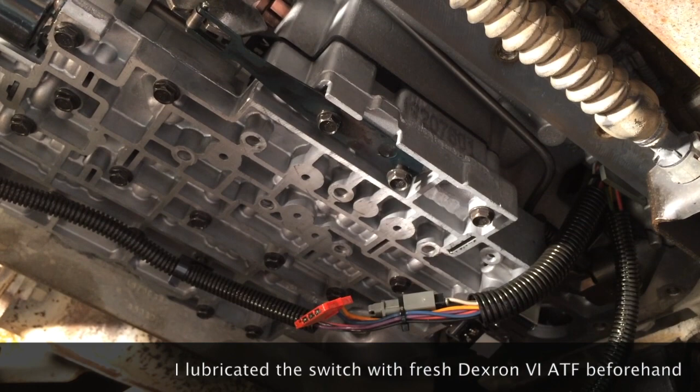The other thing we'll do is we'll grab our new pressure switch, and we'll get the 8mm bolts that secure that. We'll get that in position as well. Hand tighten these guys. Right, so we'll pause this. I'll get these guys hand tightened in, and we'll come back and we'll start torquing stuff down.

All right, we got everything hand tightened. We can start putting our electrical connectors back in. These are pretty self-explanatory, and they only go one way. So we got the pressure switch one here. There's a double one here for this guy here. Just make sure he snaps on. And there's a single one for this guy here.

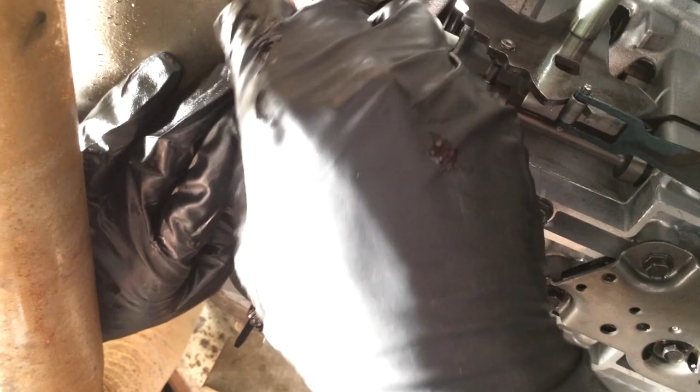Okay, got these guys in. And then there's a double one over on this side. And then the force motor. It's got two prongs that get lined up into this connector, and then he's got a little clip. If he's fully seated, he'll snap in. There he goes. Okay.

All right, the first thing that you torque down to 97 inch-pounds is going to be the pressure switch. It's a sequence of 1, 2, 3, 4, 5, 6. And this is an 8mm for this guy. And of course, naturally, the 8mm socket tried to get away. 2. Just going to double check my picture down here.

3. 4. 5. 6. All right. And now I'm going to go back to my 10 for the rest of these. Now the valve body itself has a sequence as well, and what I'll do is I'll show you guys in the video the picture of it, but I'll get the first few started.

First few started on the first row here. It'll be 1, 2, 3, and 4. So this is 1 right in the middle. This is 2. This is 3 over here. And this is 4 over here.

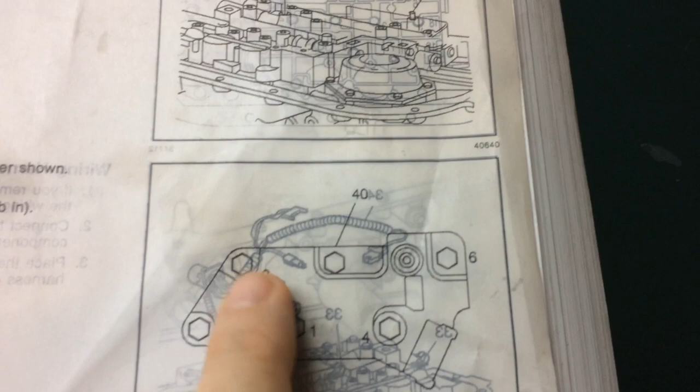So here's a view from the service manual. And this is a shot of the sequence for the pressure switch. You can see we've got 1. It's not numbered, but this is 2. 3, 4, 5, 6, and then over here you can see it's 97 inch-pounds. And then if you go through the manual, you can find over here, and again, 97 inch-pounds for the valve body bolts.

You can see here 1, 2, 3, 4 is the sequence in the middle, and then 5, 6, up here, and then 7, 8, 9, 10, 11, and then 12 would be the bolt that we showed in the video that's holding down the oil pipe.

Then 13, 14, 15, then down here for 16, and then after 16, 17 is up here in the corner, then 18, 19, and then for some reason another little typo in the manual, it just jumps to 21.

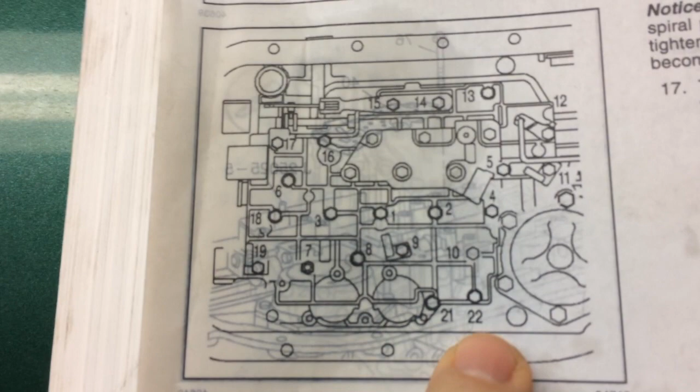It should say 20 and 21. So I hope that helps you out. So when you get number 12 done, it's time to put the oil crossover or the fluid crossover pipe back in. There's a small hole that it came out of right through here. You can line it up, and then it goes up here in the other hole, and just push it in so that it's fully seated. And then the number 13 bolt is used to secure this bracket.

It's almost in, hand tightened. And so the reason this is like this is with this pipe here, you can't get to this bolt, so they have you torque that up first before you install this. All right, we'll just do this guy again, 97 inch-pounds on all of these 10mm bolts. I'll continue torquing these and we'll come back. All right, we got these guys all torqued up.

It wasn't that long ago that I changed the bushing for the filter. Whenever you buy one of these new GM filters, they come with a new bushing, but I'm not going to change it out again because I had just done this maybe 6 months ago. So we're going to press our filter into the bushing. That's our last piece, really. I don't know if I gave you guys the number for the kit, but the number for this kit with the filter and the bushing from GM is 242-10956. At this point, we're ready to put our pan back on.

Now, before I did this, off camera, I had taken a clean rag and gone around the gasket seal area just to make sure I didn't have any dirt. And before this, we had gotten a gasket scraper and gotten it all clean and prepared. So we've got our pan all cleaned out, we've cleaned off the magnet, got our gasket all clean, and now we're ready to put this guy in. So come up at an angle like this. Back first.

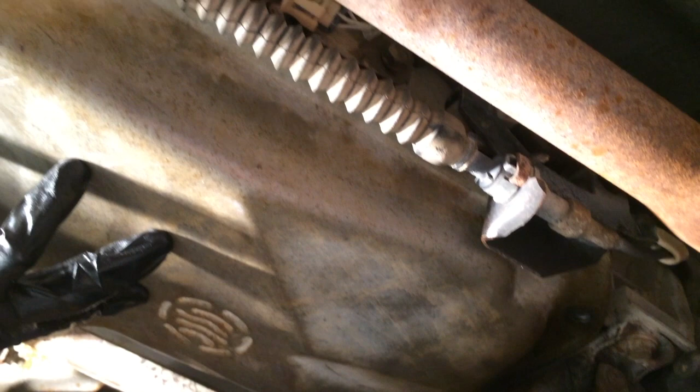Just a little bit hard to do this upside down. Just got to get it to clear this bracket that's holding this guy. That's usually what's in the way. All right, and then I'm going to try to get a couple of bolts in at each corner. Make sure that we have our gasket centered. Reach up here, move it around if you need to. Alright. I'm just going to screw this in by hand as far as I can get it so it can help me hold this.

Alright, and then the transmission mount will usually hold it for you on the back. I'm just going to keep going around, putting these 10mm pan bolts back in finger tight, and then we'll come back and torque them. Okay, I've gotten these all in hand tight, and now I'm going to torque them. They get the same torque value as the reverse accumulator, which is 18 foot-pounds, or with this smaller torque wrench, I'm using 216 inch-pounds.

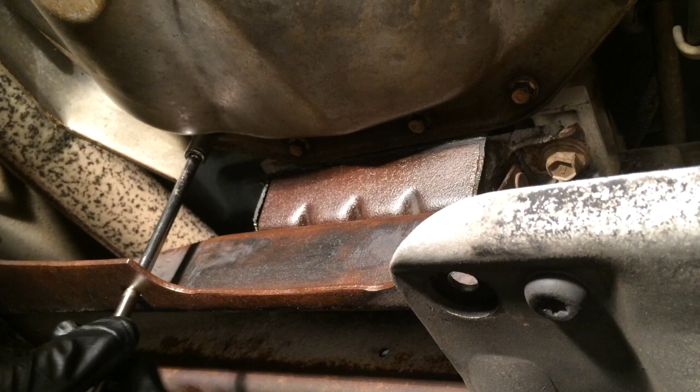What I like to do is go onto opposing corners, and then I'll catch all the ones in the middle. A couple of tips for these ones in the back. These are the hardest ones. On most all these trucks, this one has a skid plate, but this piece here has a hole built into it so that you can put your wrench up here and torque this guy down. And very similarly, there's a hole on this side. You can torque this guy down. I guess I didn't have that one in as far as I thought.

And the other ones that are kind of hard are these ones in the very back. You might be able to push up against the rear mount and get them, but if not, you might have to get a swivel in here. The key is to get them turned in by hand all the way. All right, so I'm going to finish torquing these up, and then we're going to add Dexron 6 fluid. We're going to put 4 quarts in, and then go through a warm-up sequence and make sure all the gears get shifted through.

So we'll come back after that. Came out here to try this out. I got the vehicle out of the garage. It's snowing right now, so I won't be able to do as much as what I wanted. It's kind of snow and rain. You can see up here on the dash here, it just started.

But basically, I've got it started up. I've let it sit in park for about 20 minutes. And then what I'm going to do is I'm going to walk it through the gears. And what I'm trying to do is I'm trying to get all the air that's trapped in the various passages of the valve body and the other parts that we changed, and just work things around.

So ideally what I'd do is I'd sit it for about 5-10 minutes in each of these gears. I'd sit it in neutral for a little while. I'd sit it in overdrive for a little while. And again, there's like maybe 5 minutes or so. Third gear. And the other thing I'm doing is as I go through these gears, I'm trying to feel, do I feel things shifting into place? Second gear, and then lastly, first gear.

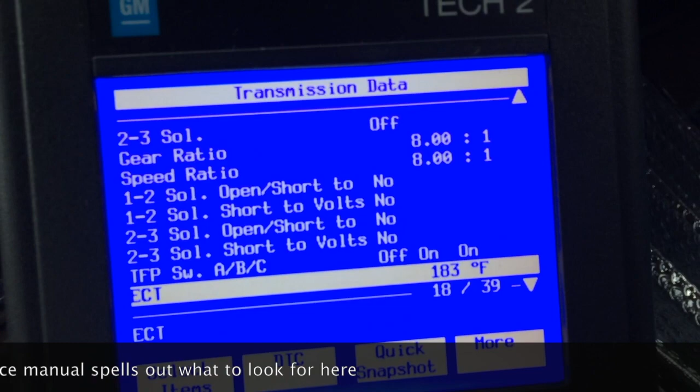But I think we're going to be good here, and this service engine soon light came on when we originally started the repair with the original codes. And I'm going to leave it there. I'm not going to clear it, because what I want to have happen is I want to see it clear itself naturally, which it will do after so many cycles.

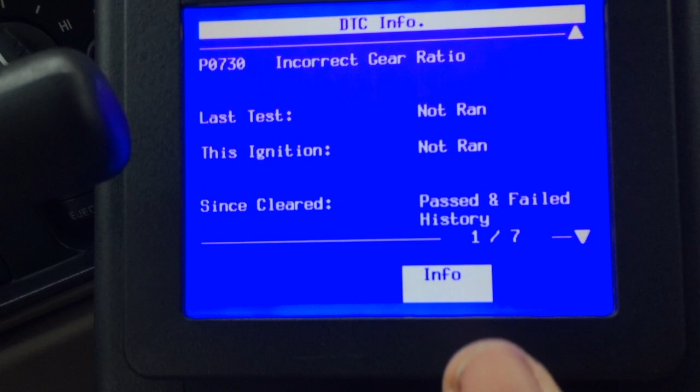And if we check our Tech 2 now and take a look at the DTCs, diagnostic trouble codes, we can see the ones that we had, right? So previously we had this 730. There's a whole series of codes because of this problem. Haven't run it yet though, but I'm expecting that to be fine. Our second to third shift solenoid valve, that was the last time that we drove the vehicle. That failed. I'm expecting that to be fixed.

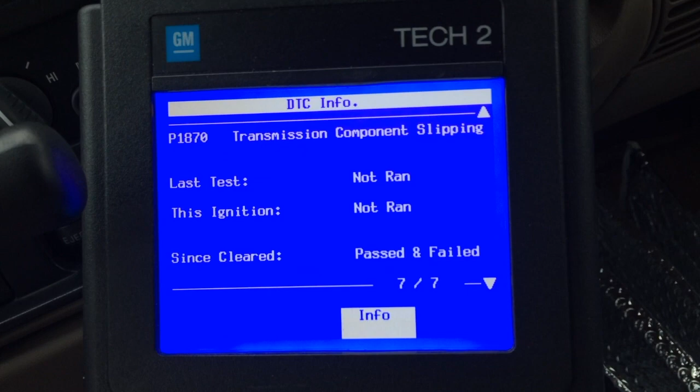Right now we can already see this U1192 that we got as the electronics were failing in the transmission. That has already passed, so that's going to be cleared. And this P1626, which was also related to the electronics problem, it's already passed. It'll be cleared. This P1643 control circuit problem, it's already passed. This 1654, it's already passed. 1870 hasn't run yet because I got to get it out on the road, but that's the main one I'm after with this repair that we did. And it's just going to keep cycling through these.

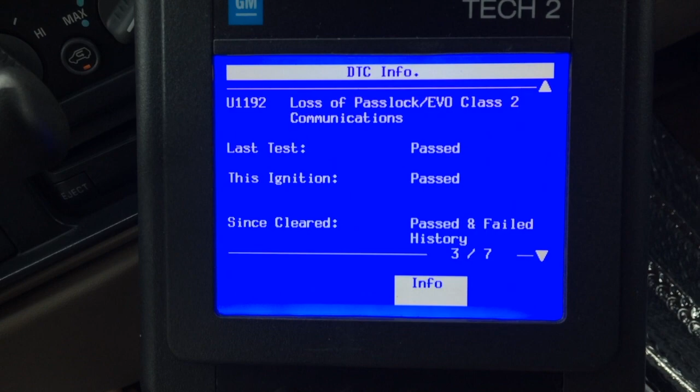So you can see, again, if you don't have a Tech 2 here, right? You can just hook up any kind of OBD2 reader and pull these codes. But I like to leave them in here, not clear them, and let the onboard powertrain control module clear them as they're passed. Once they're all like this, where it's passed on this test and the last test, after so many of these, it clears it anyway. And so one day you're driving down the road, maybe in a day or two, it'll clear up, and then you know it's a good repair. Whereas if you clear it out, you can't be really sure.

All right, I hope this long-ass video helps you out. There's something in here for everybody. If you're just doing the valve body, or if you're just doing any of these individual pieces, there's something in here for you. But I hope this helps you out.